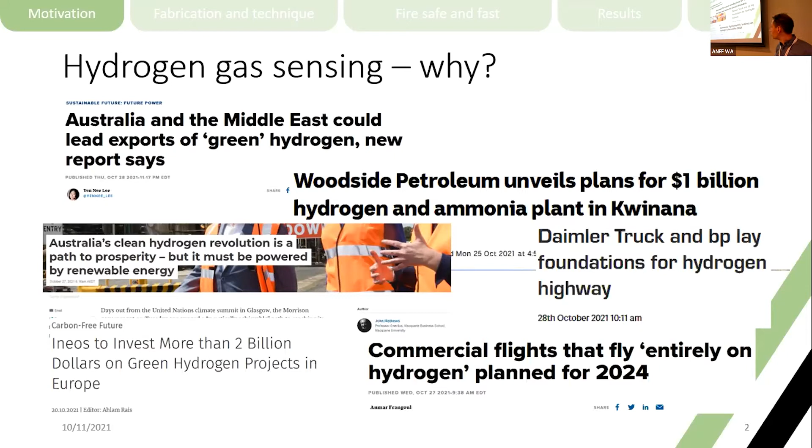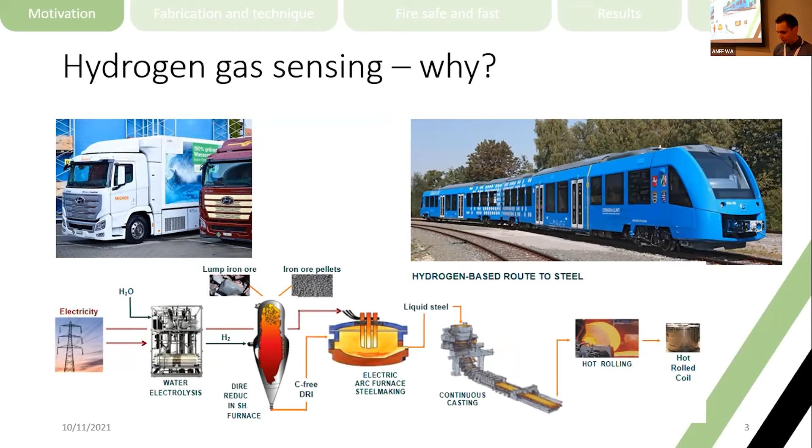Well, hydrogen could be a solution to decarbonize the hard or expensive to decarbonize industries. Which are those? We are talking, for example, long-distance transport, railway lines which are not electrified so far, and the fabrication of steel without coal. Hydrogen is going to be a thing. However, hydrogen gas sensing is actually not new. That goes back quite some time. However, the current commercial sensors are not quite up to the task.

The current sensing techniques, for example, don't cover the full concentration range from near 0 to 100%. They typically use 2 sensing techniques to cover the whole concentration range, and this commercial sensor shown here uses, for example, a capacitive measurement and a resistive measurement on a nickel-palladium alloy.

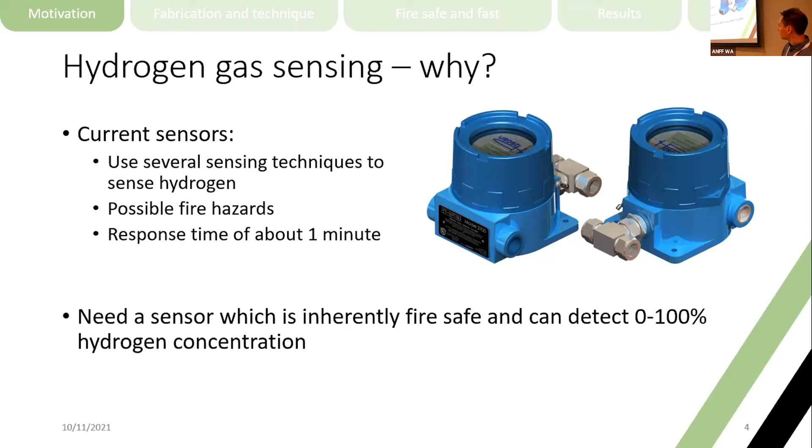And you see, for both those techniques, you apply a voltage in the hydrogen environment, and then there is a possible, yet small, fire hazard. And also, these sensors have a typical response time of about 1 minute, and we just think that could be faster. What we would need is a sensor which is inherently fire safe and which can detect this broad hydrogen concentration range.

Instead, I want to present to you the magnetic hydrogen gas sensor. Our group has proposed this sensing technique quite some time ago. I don't have the time to go too much into the details, so I will just present our latest research, and I hope I can explain its working principle on this example.

Now, the make or break of any hydrogen gas sensor is the sensing element. In our case, this is a cobalt palladium rectangle shown there in blue. It's 30 micrometers long, 20 micrometers wide. Basically, when this cobalt palladium is exposed to hydrogen, its magnetic properties change. So that's why we call it the magnetic hydrogen gas sensor. In the alloy, the cobalt is responsible for the magnetic response, while the palladium makes it sensitive to hydrogen.

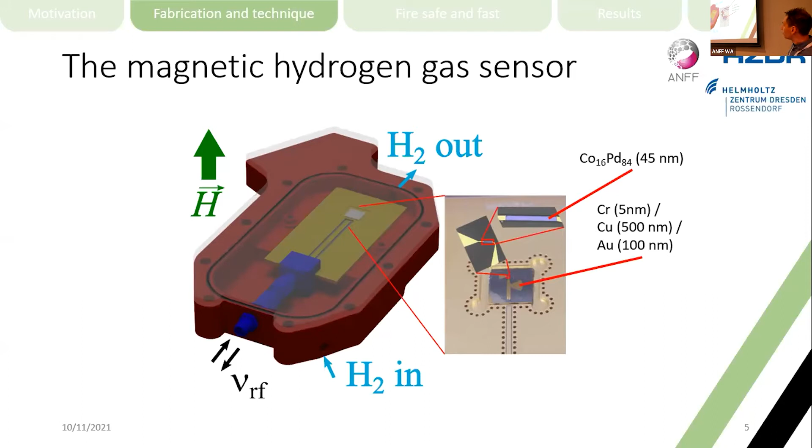And because the composition is so important for this alloy to work, I want to talk about how we fabricate this alloy. We use a technique called biased target deposition, and we have equipment at the WA node of ANFF to use this biased target deposition, and that machine is called 4Wave. The inside of 4Wave is basically a vacuum chamber. It contains 6 material targets, and on the far end is basically an electron gun and an ion source, which together build a plasma source.

And you can imagine the substrate would be on our end, built into the lid, which is currently open. The whole assembly is basically a hexagon-shaped prism with the plasma source on one end and the substrate on the other end. On the right-hand side, I show you how biased target deposition works. So we have a plasma source. This plasma source is emitting a very low energy plasma. The ions in this plasma have very little energy so that they don't damage the chamber or sputter away any material. The target from which we want to deposit material is then biased with a bias voltage.

And when the ions come close to the target, they get accelerated, they gain momentum, they gain enough energy to actually sputter material away from the target. The material that gets sputtered away flies through the chamber and lands on our substrate. Now in 4Wave, we typically apply this voltage as a pulsed DC voltage, and because we can control up to 4 targets at the same time, we can apply this pulsed DC voltage to up to 4 targets at the same time, and we can control the bias strength and the pulse duration. We can fabricate any arbitrary alloy with up to 4 constituents.

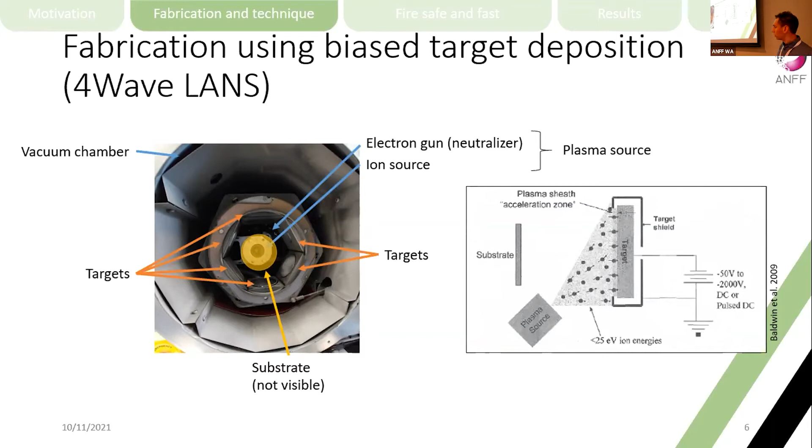Now we come back to the hydrogen gas sensor. How do we probe the magnetic properties of this cobalt palladium strip? We use a technique called ferromagnetic resonance spectroscopy. Very, very simplified, at ferromagnetic resonance, a magnetized ferromagnet, so the cobalt palladium alloy, will absorb microwave energy at a specific microwave frequency. That microwave frequency is given here on the right-hand side. It depends on the material parameter, which, for example, could be dependent on the cobalt content in our alloy, and on the magnetic field which we apply to magnetize the ferromagnet.

Now, when this cobalt palladium alloy absorbs hydrogen, its material parameters change, and because we fix the microwave frequency, that means the resonance occurs at a different magnetic field. We supply the microwave energy to the cobalt palladium alloy using that waveguide shown there. That waveguide is a microwave microresonator. And I just want to acknowledge the people from the Helmholtz Center in Dresden-Rossendorf, because they came up with the idea. They fabricated this resonator, which is actually deposited on top of our cobalt palladium alloy.

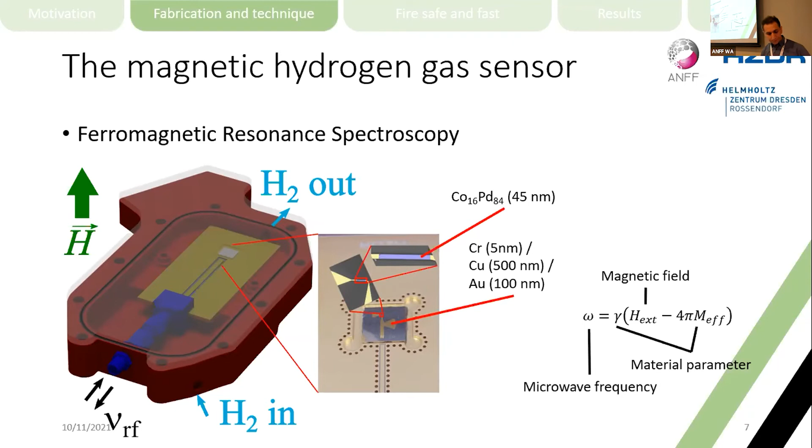Now, how is that exactly fire safe or fast? Well, our technology could be fire safe if we imagine it like that. We have the waveguide, which contains the microwave current that produces our magnetic field, which ultimately drives our ferromagnetic resonance. Microwave magnetic field can penetrate insulating materials. So you can imagine that as the vessel wall of a hydrogen container.

However, the microwave magnetic field is completely shielded by the cobalt palladium thin film, so nothing of that microwave magnetic field actually penetrates the hydrogen vessel itself. So we can completely separate all the active elements, so the waveguide, from the hydrogen environment. That makes it very fire safe.

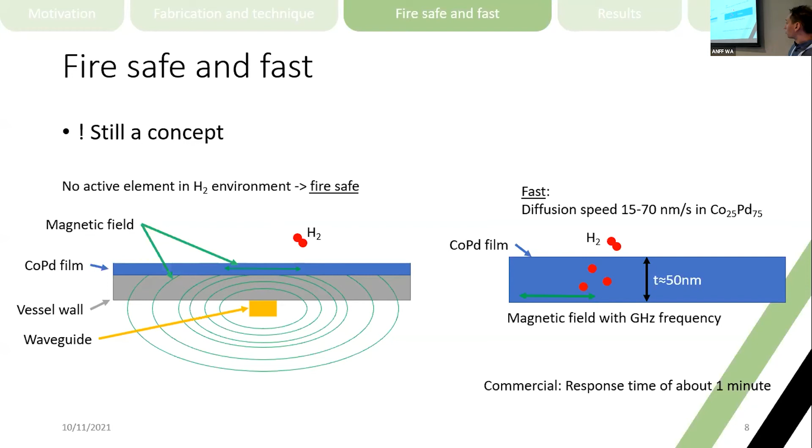And why do we think it's fast? Well, microwaves work in the gigahertz frequency range, so that's fast by itself. And the hydrogen diffusion speed in cobalt palladium is between 15 and 70 nanometers per second. And our typical thicknesses for our thin films is about 50 nanometers. So we should get a response within a few seconds, compared to the commercial sensor, which I just said has a response time of about a minute.

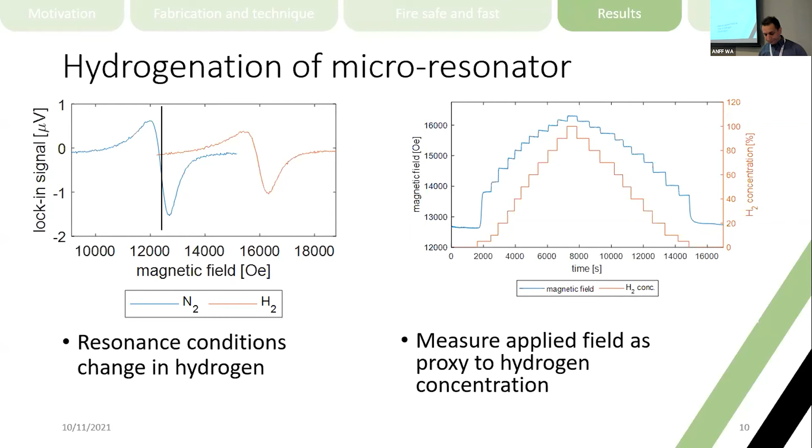Now, to finish off, a quick outlook. We still need to work on the fire safe and fast. These have been mostly concept. We have shown in other research that it is possible to go fast and to be fire safe. However, we haven't actually shown that it can be combined into one principle. And if you pay very close attention, the research I just showed you is neither fire safe nor very fast.